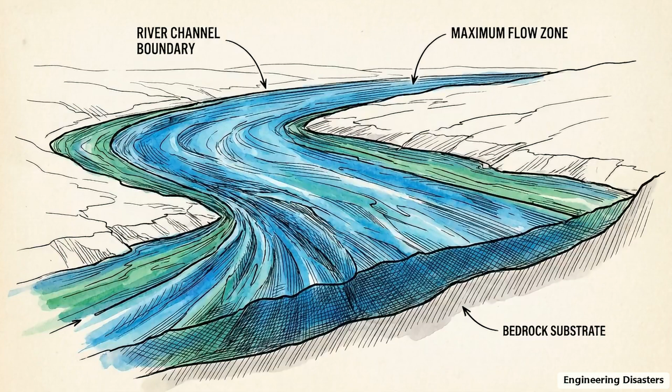On August 29, 1907, 19,000 tons of steel fell into the St. Lawrence River. The entire structure dropped in roughly 15 seconds. This was the Quebec Bridge, midway through construction.

It was designed to span a deep, fast-moving channel without scaffolding rising from the water, making it the largest cantilever bridge anyone had ever attempted.

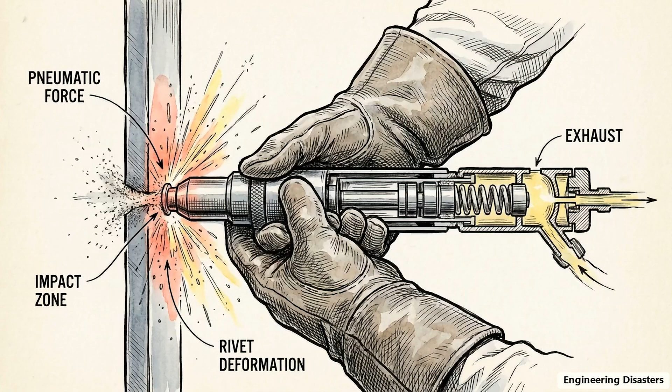Late that afternoon, 86 men were out on the furthest reaches of the steel, operating pneumatic riveters and assembling the final sections of the southern arm. When the dust cleared, 75 of those workers were dead, buried in a massive pile of tangled ironwork stacked along the riverbank. Every ton of steel added to the span moved the structure toward a limit that had already been breached in the design phase.

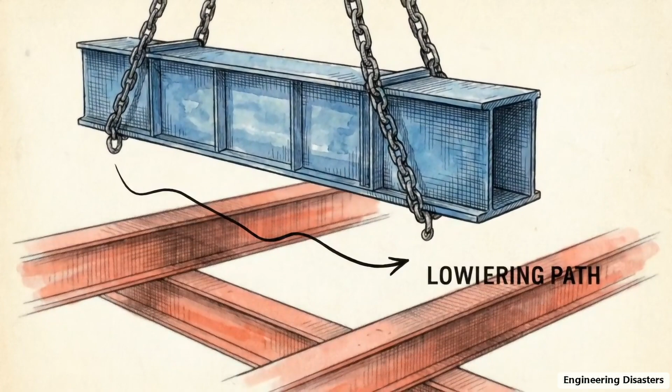The path to the collapse begins with a single compression member and leads directly back to a desk in New York, where a mathematical error remained uncorrected for years.

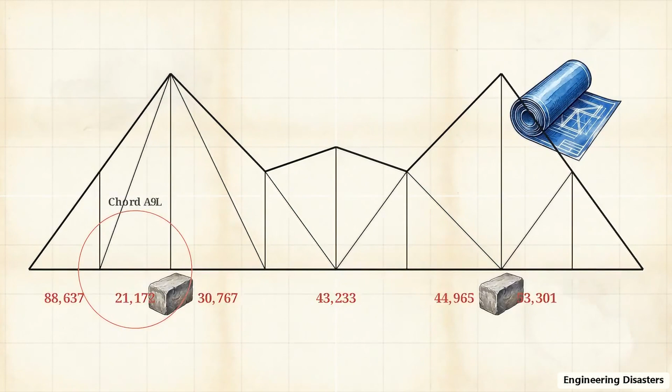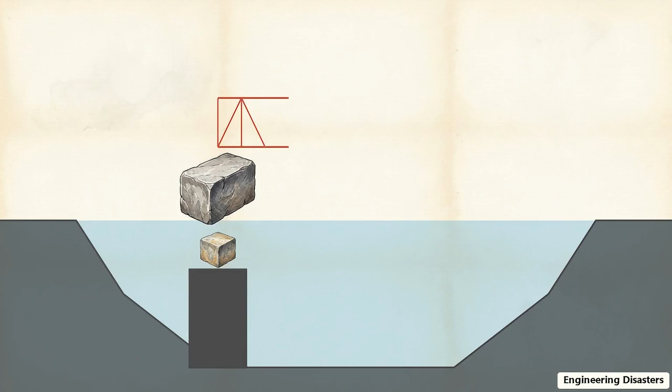The 15-second collapse was the physical execution of a systemic mathematical discrepancy, finalized years before the first piece of steel arrived at the site. To understand how this happens, we have to look at how a cantilever bridge manages its weight.

A cantilever is an anchored beam carrying its load outward into empty space. You balance two massive steel arms on opposite banks, and they reach out to meet in the middle. Early in the design phase, the main span of the Quebec Bridge was lengthened from 1,600 feet to 1,800 feet.

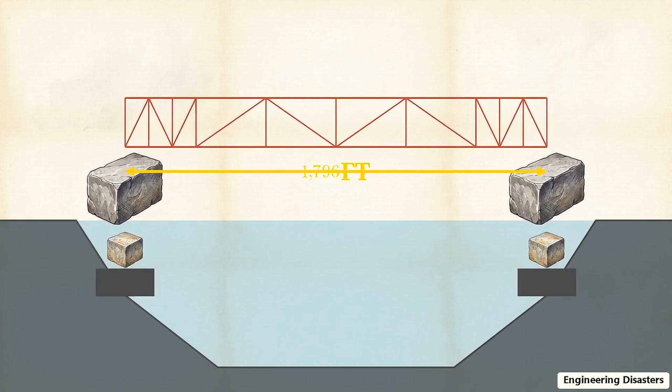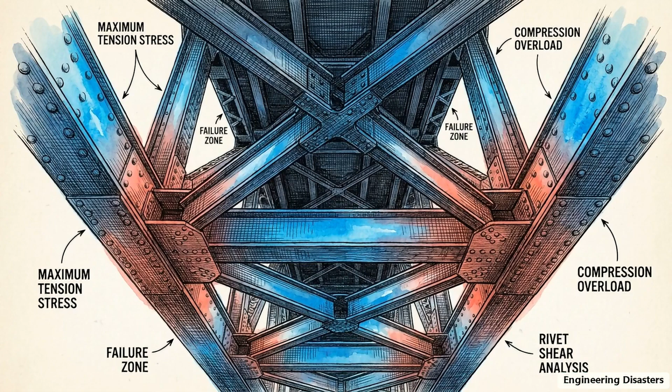Pushing the support piers closer to the shore, into shallower water, saved a massive amount of money on the underwater foundations. But extending the reach of a steel span creates a steep physical penalty. A longer bridge is an exponentially heavier bridge.

Before a bridge carries a single train or pedestrian, it has to hold itself up. The permanent weight of the steel structure, the deck, and the rivets is called the dead load.

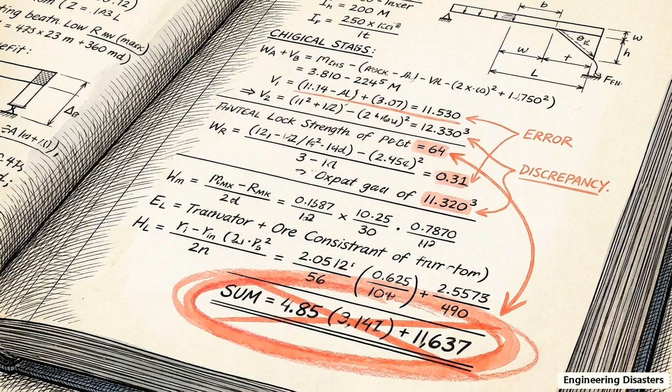When the span was extended, the detailed design calculations handled by an engineer named Peter Szlapka were never revised to account for the massive increase in that dead load.

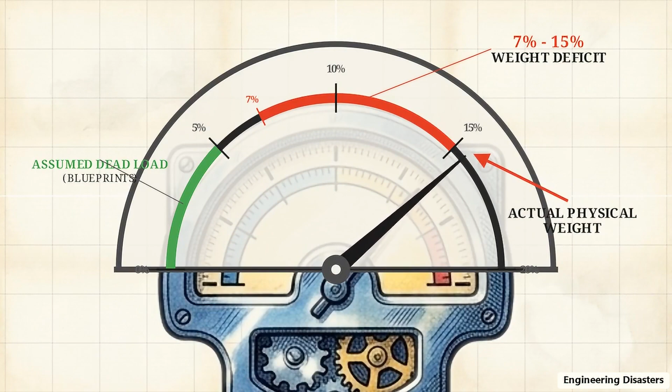This gauge visualizes the resulting error. The physical bridge being constructed over the river was anywhere from 7 to over 15% heavier than the assumed weight written in the blueprints. Dead load is the foundational number for every other equation in structural engineering.

Because that base integer was drastically underestimated, every subsequent stress model for the entire bridge was a fiction.

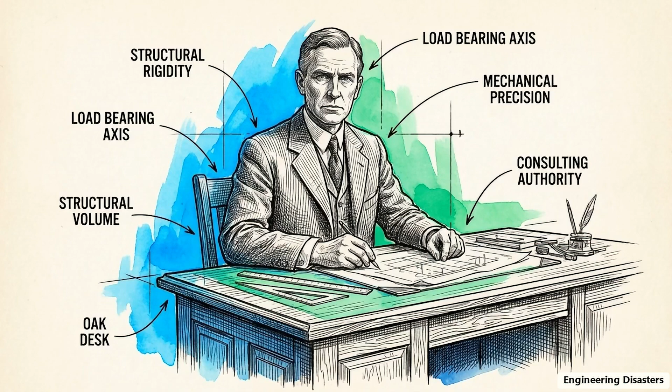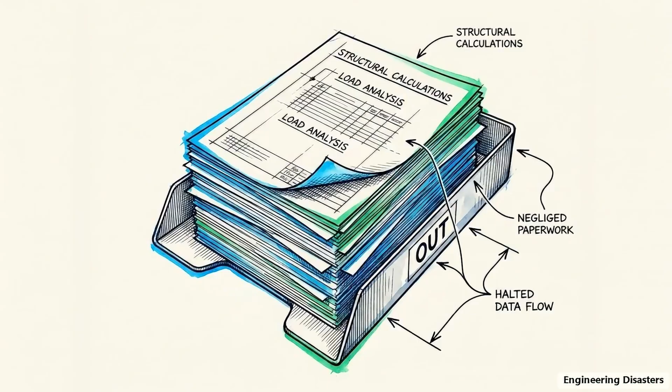The man reviewing those models was Theodore Cooper, an American consulting engineer with immense authority. Cooper operated out of New York, rarely visiting the site, and he refused to allow any independent engineer to check his math. Instead of catching the weight discrepancy, Cooper compounded it by altering the allowable stress.

This is the maximum physical force an engineer permits each square inch of steel to bear. This chart shows how Cooper pushed the limits of the material.

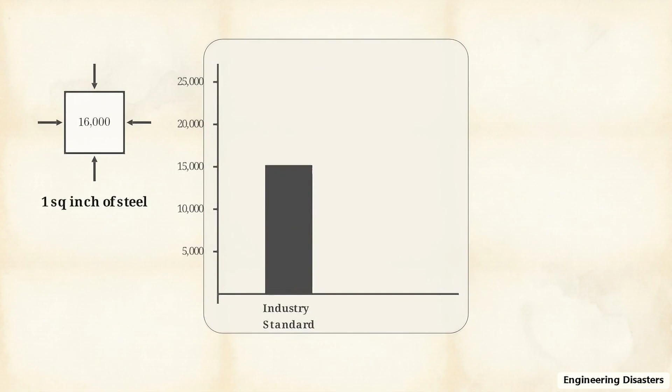The conservative industry standard of the era sat at 16,000 pounds per square inch. Cooper pushed his allowable ceiling up to 21,000 and eventually 24,000 pounds per square inch. At the same time, he reduced the amount of wind load the bridge was required to resist, dropping it from 56 pounds per square foot down to 30.

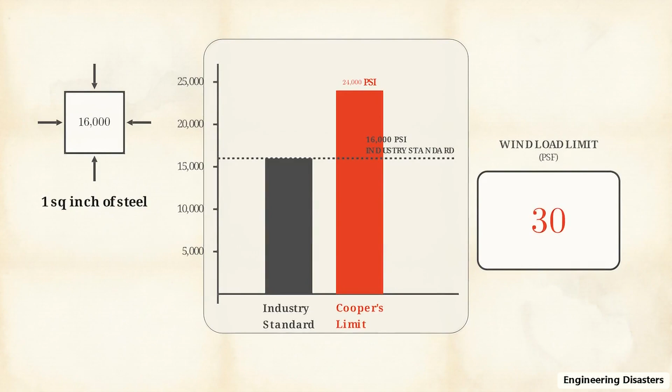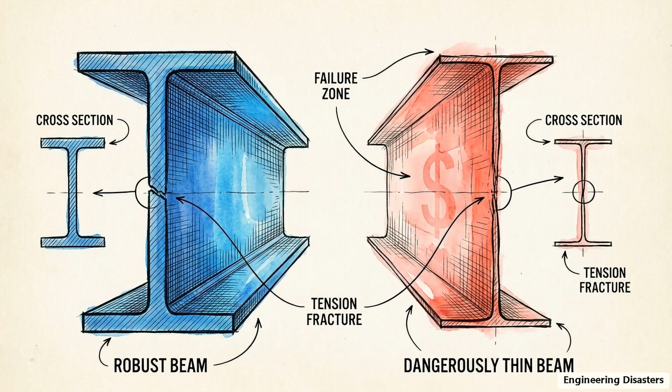These adjustments served a strict economic logic. Permitting the steel to carry more force meant you could build the exact same bridge using significantly less material, heavily cutting costs. In a perfect system where the base calculations were flawless, these aggressive margins might have held.

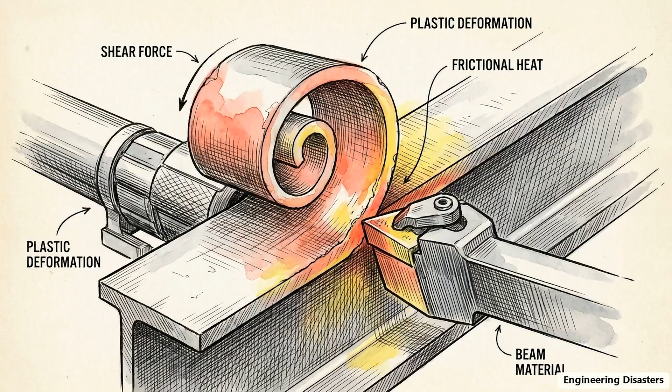But against a dead load that was already severely underestimated, they were lethal. By shaving away the structure's safety margins to save money, Cooper systematically eliminated the bridge's capacity to absorb the uncalculated excess weight it was already carrying.

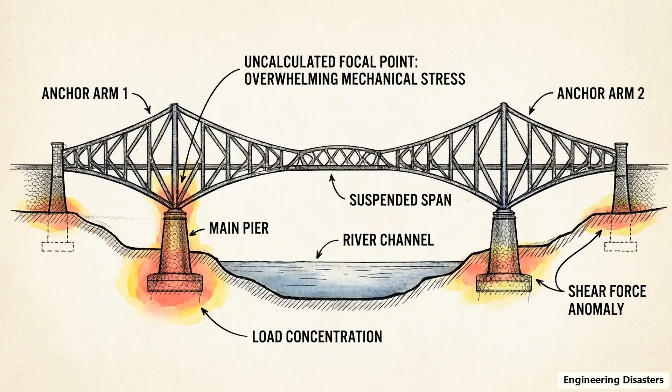All of that uncalculated pressure flowed directly into the lowest, most heavily squeezed part of the bridge, the massive lower chords of the anchor arm near the main pier. This is the specific component that failed, a compression member labeled chord A9L. It wasn't a solid bar.

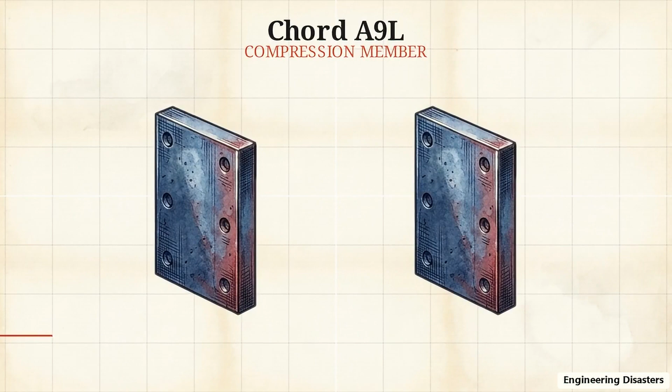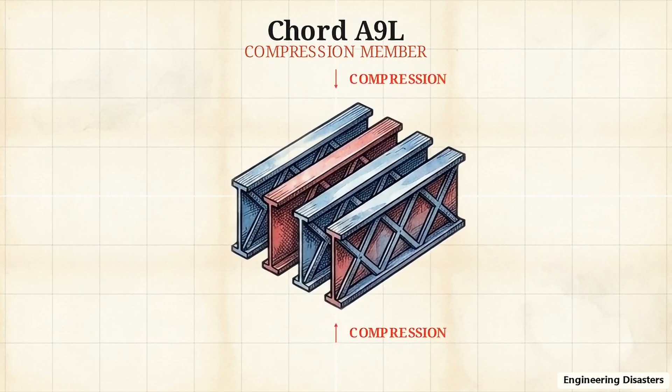It was built from multiple massive steel plates, over 4 feet wide and an inch thick, stacked side by side. To keep these plates functioning as one unified column, engineers tie them together with a crisscrossing web of smaller bars. This is called latticing. Latticing forces the individual steel plates to buckle together under immense compression, rather than peeling apart and warping independently. If you squeeze a tight bundle of wooden rods, it holds firm.

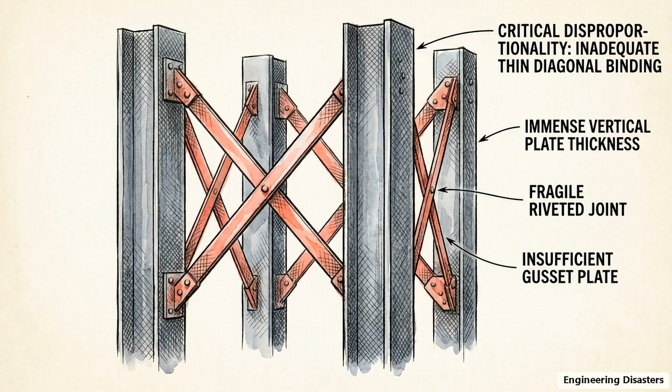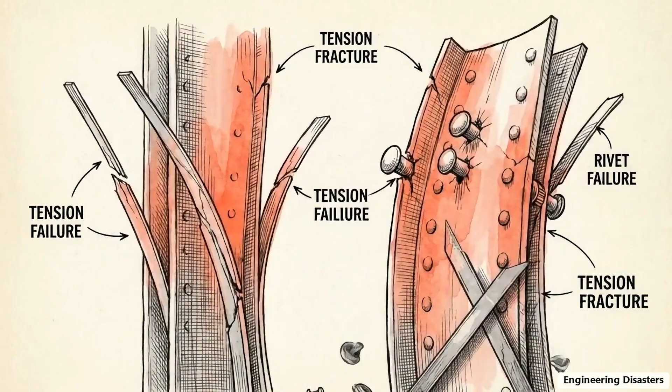If you loosen the binding and squeeze again, the rods instantly splay outward in your hand. The latticing designed for chord A9L was completely inadequate for the actual, uncalculated dead load it was bearing. Under the true weight of the span, the plates inside the chord were left half loose. They began bowing outward, slowly peeling away from their inadequate bindings. At 32 minutes past 5, the latticing on A9L snapped. The heavy plates splayed outward.

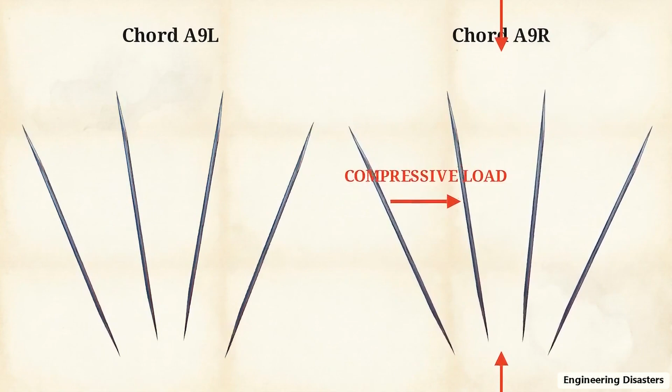The instant it failed, the entire compressive load slammed across the bridge into its partner chord, A9R, causing an immediate catastrophic structural collapse. The physics of the bridge simply collected on a debt created years earlier, when the theoretical capacity of the latticing was overwhelmed by the actual dead load.

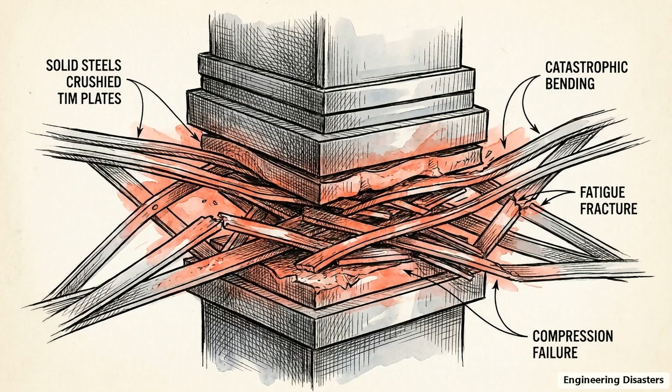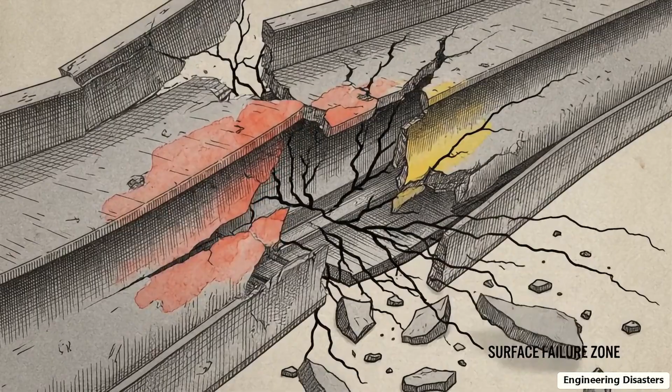A steel structure of this size rarely collapses without warning. Overloaded steel yields plastically. It bends in fractions of an inch long before it snaps. In the summer of 1907, the bridge generated clear telemetry that it was failing.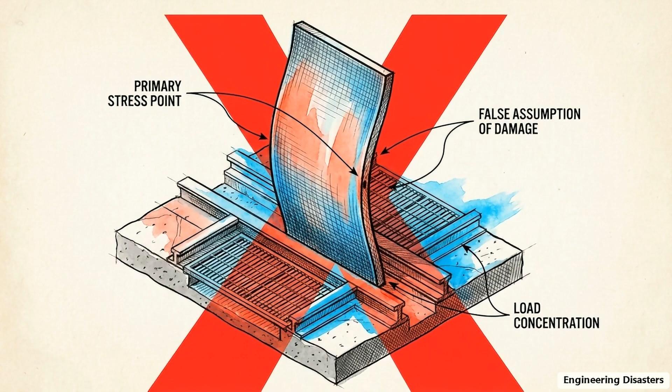Site inspector Norman McLure began measuring deflections in the lower chords. He watched them bow out of alignment, moving from 3/4 of an inch to 1 1/4 inches, and finally to 2 1/4 inches. McLure reported these alarming shifts, but off-site management dismissed them. They argued the plates were simply bent at the factory before installation, entirely missing that the structure was actively yielding under the load.

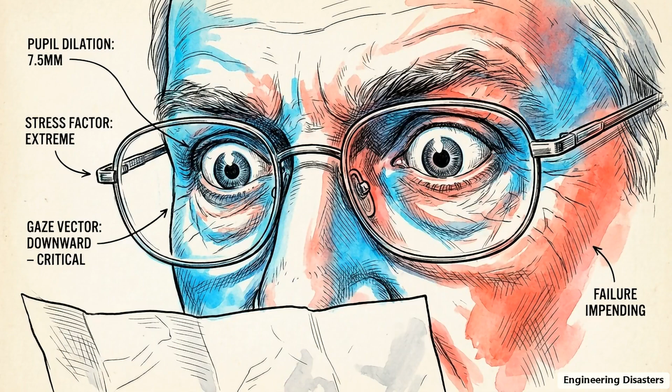Recognizing the imminent danger, McLure bypassed the standard reporting protocols. He boarded a train and traveled straight to New York to confront Cooper with the data in person. Looking at the severe deflection numbers, Cooper immediately understood the danger. On the morning of August 29th, he issued a telegram with a strict, unambiguous order: add no more load to the bridge.

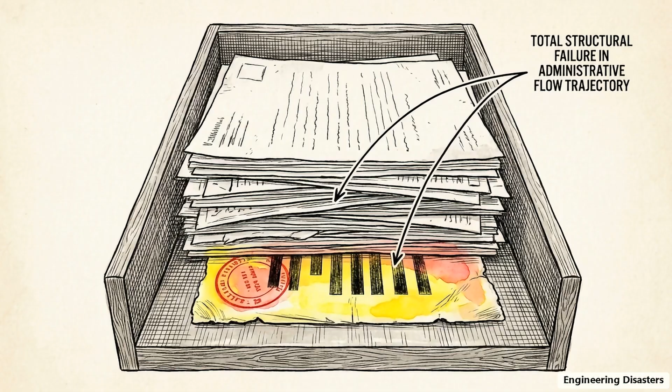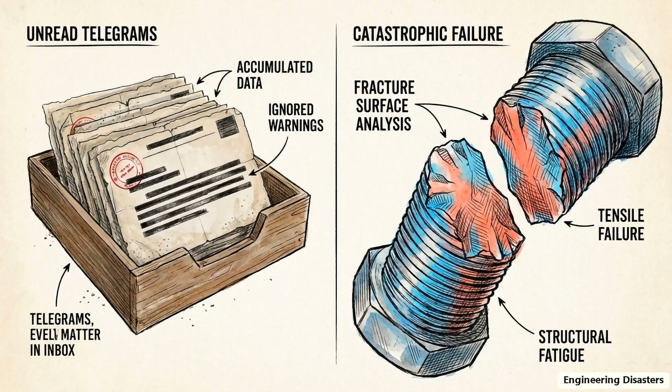But the administrative machinery failed. The telegram was stalled inside the contractor's bureaucracy. It sat unread in an office while 86 men continued to drive rivets and add more weight to the span over the river. The warning signs were recorded, measured, and escalated. The tragedy occurred because the administrative pathway required to halt the project operated slower than the physical rate of the yielding steel.

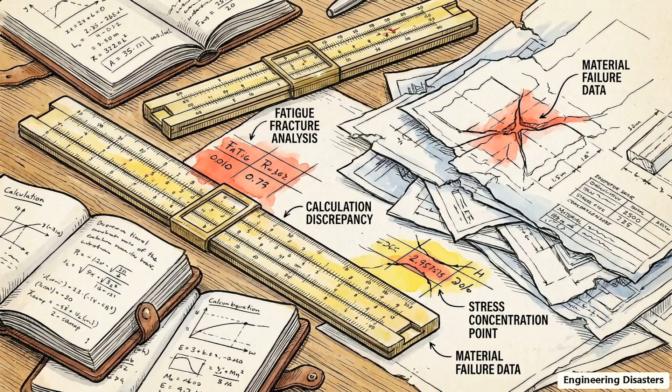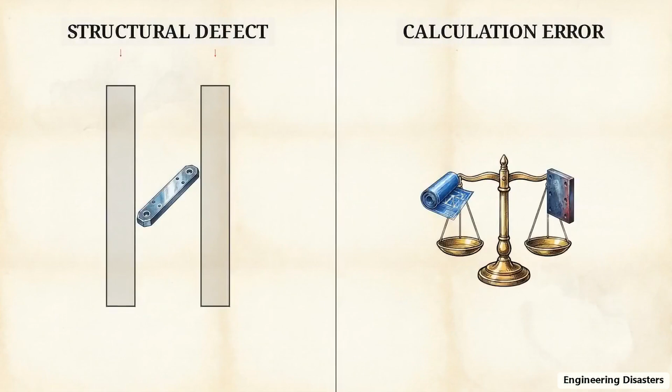In the immediate aftermath, the Canadian government authorized a royal commission to conduct a rigorous post-mortem on the engineering data. Delivered in 1908, their report was unambiguous. The commission placed the blame entirely on Theodore Cooper and Peter Szlapka for severe errors in judgment regarding the undersized latticing and the unverified dead load estimates.

The investigators noted that these were highly capable engineers. Their fatal mistake was intellectual hubris, choosing to blindly defend a theoretical calculation rather than verify it against the hard empirical measurements coming from the field. The remnants of that failure sat piled in the river, a devastating physical consequence of placing blind faith in a deeply flawed baseline integer. Yet the grim accounting for the Quebec crossing was not over.

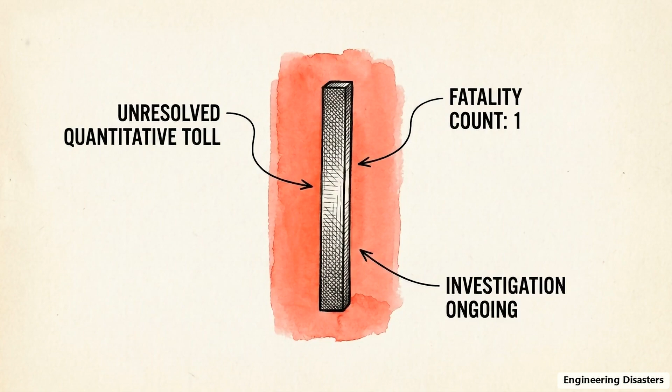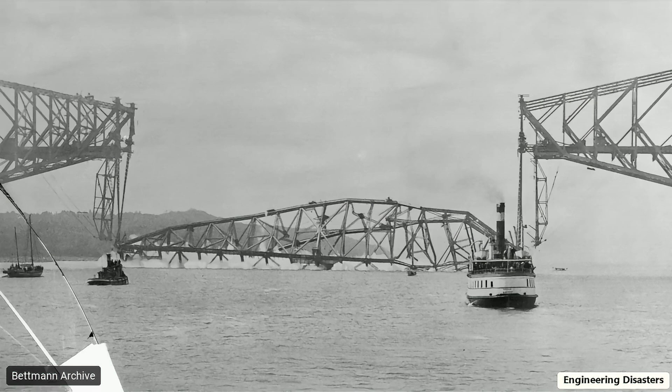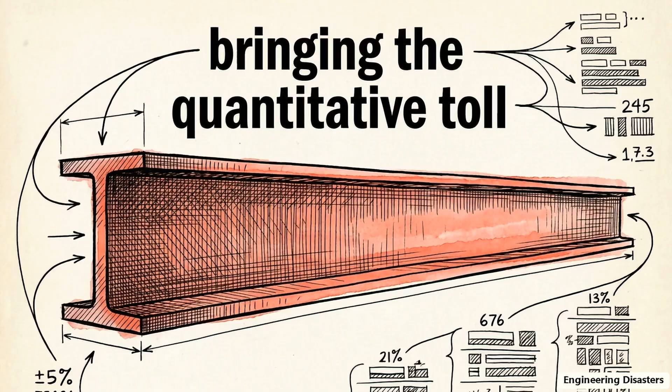The decision was made to rebuild on the exact same site, using a far more conservative, heavier design. In September 1916, as the massive new central span was hoisted into position, a bearing casting failed. The entire span dropped straight into the river. 13 more men were killed, bringing the quantitative toll to 88 fatalities across 2 separate disasters before it was finally completed.

This catastrophe led to the codification of mandatory independent peer reviews, ensuring that complex calculations for major structures are verified by multiple engineers before construction begins. The Quebec Bridge continues to carry traffic today, serving as a case study in the danger of prioritizing a design's theoretical economy over the physical reality of the weight it must carry.